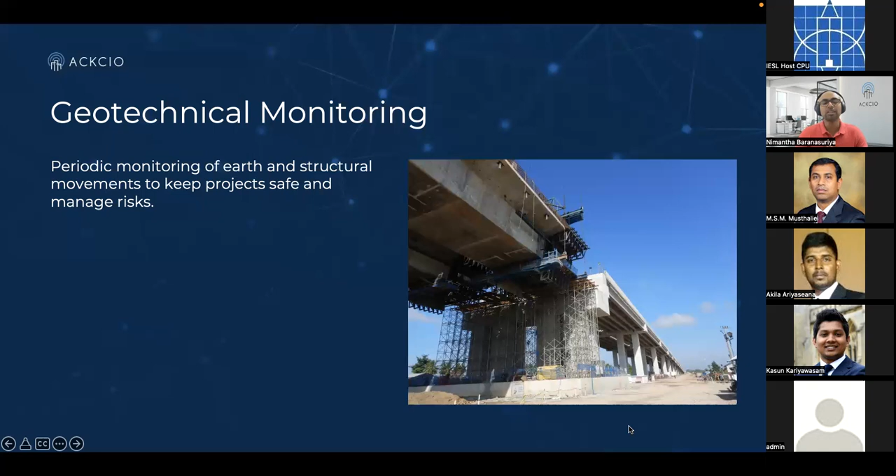It helps engineers gather lots of data from the actual construction project and compare those data points with the design of the project and see whether something is deviating from the norm. So if something is deviating, they can take early action and prevent a very costly accident from happening. And if an accident were to happen, the consequences can be devastating, like people might even lose their lives. And also there might be monetary losses and delays of the project as well. So this is why geotechnical monitoring is very important. So people have been doing geotechnical monitoring for the longest time.

I mean, this is not a new area. And there are so many sensors that help engineers and consultants get various data points from all their infrastructure development projects. So some simple examples include tilt sensors. You can place tilt sensors on any wall or any column that you want to monitor, and then check whether it's still straight or whether it starts tilting over time.

And there are things like crack sensors. So if there's a crack on a certain wall, again, a crack sensor can be put against it to monitor whether the crack is expanding over time. Right? If the crack is expanding, it can be a dangerous sign. There are other sensors like soil water pressure sensors, like piezometers, that can be embedded in soil to monitor the soil water pressure. And those are very important in excavation projects where the water body of the soil is disturbed.

And there are things like strain gauges or load cells that can monitor the load that is being carried by a beam or even a column. And there are other complicated sensors like deformation sensors which can go into the soil, like hundreds of meters into the soil, to monitor how the different layers of the earth are deforming because of excavation work or any other soil movements, right?

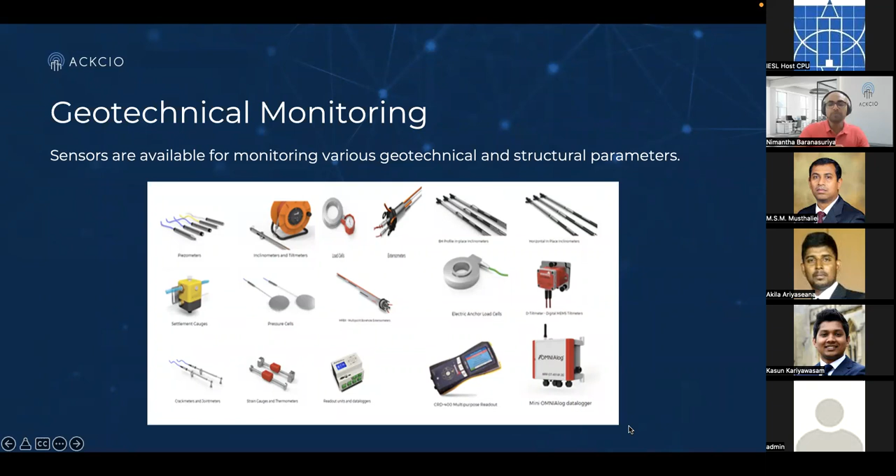So the sensor space is quite diverse, and there are so many sensors in the market already that allow engineers and contractors and consultants to monitor any parameter of their choice in their critical infrastructure development projects. But what's problematic is that these sensors are currently monitored using very legacy solutions. Meaning, let's say you need to monitor a set of tilt sensors, piezometers, even crack sensors in a project. So there are two main solutions that companies leverage for this monitoring purpose.

One is workers. So they send workers with these handheld sensor readers to visit every single sensor in the site and take readings using this handheld sensor reader. So this process is very costly because it involves a lot of workers going around in the site monitoring sensors. And also it actually imposes a safety risk because when there are more workers in the site taking all the sensor readings, they can be prone to accidents in the site.

And secondly, the accuracy of these readings can be low as well because the worker has to manually connect this reader to, say, for example, the tilt sensor to take a tilt reading for the day. And while doing that, they might be tired or might not connect the sensor properly, and in that process might take incorrect readings from the sensors.

And lastly, if you're using workers, it's very difficult to monitor sensors frequently. So at most, a sensor can be monitored once a day, which is problematic for certain projects like excavation projects where the earth and the structures might move very rapidly in a matter of 24 hours. So those are the problems associated with using workers or manpower to monitor geotechnical and structural sensors.

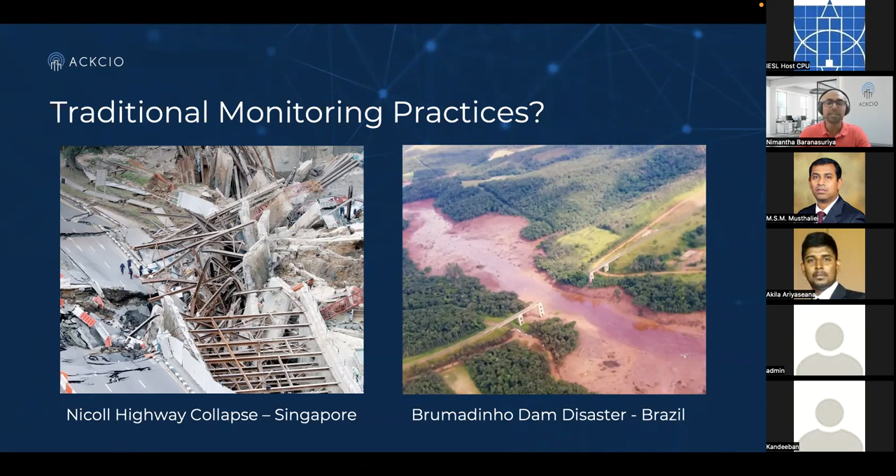So moving forward, we discussed the problems associated with legacy monitoring practices. If monitoring is done in real time using remote monitoring technologies, there are many advantages that can be achieved. One is workforce safety, because you're not sending workers to the site anymore to take manual readings. You don't need to expose workers unnecessarily to hazardous environments, and therefore the safety of the entire project goes up. Secondly, and most importantly, you can implement better risk management processes, because now you have a very seamless way of getting all the sensor data gathered from the entire project. You have the data at your fingertips to take real-time decisions.

To keep things simple, let's say you're monitoring a tilt sensor, so you'll be getting tilt data once an hour. So once an hour, you know whether the column that you're monitoring is upright or whether it is starting to tilt. And before it tilts a lot and collapses, you can take quick actions to investigate why the column is tilting and take appropriate risk management solutions to ensure that the safety and the integrity of the project is not compromised.

Thirdly, remote monitoring can help reduce costs, because now you are dependent on fewer workers and less cabling. The wireless solutions that are available in the market now can help dramatically reduce the costs of monitoring geotechnical and structural sensors.

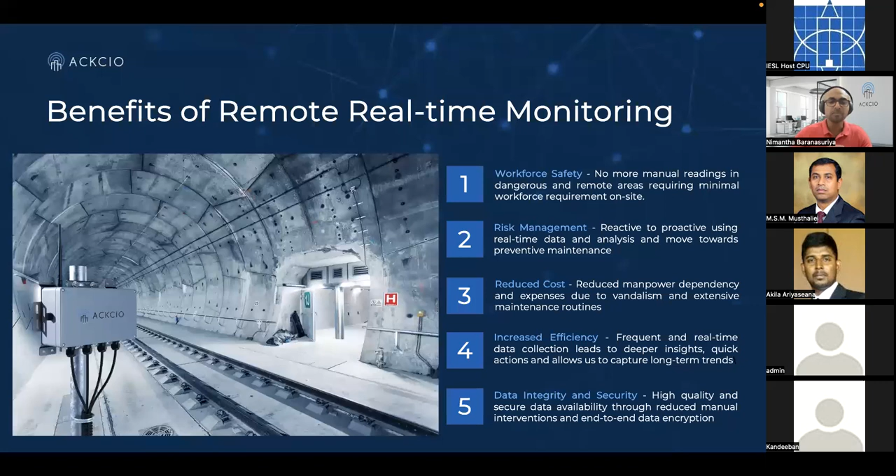The fourth benefit is increased efficiency, again, because now you have seamless amounts of data coming in. You can take quick decisions, and the entire process of constructing the infrastructure project becomes quite efficient. And finally, the data is secure, and everything is integrated into one system, which will help stakeholders like consultants, engineers, and everyone involved in the project understand what's happening in the project and take quick decisions as well. So these are the benefits of doing remote wireless monitoring.

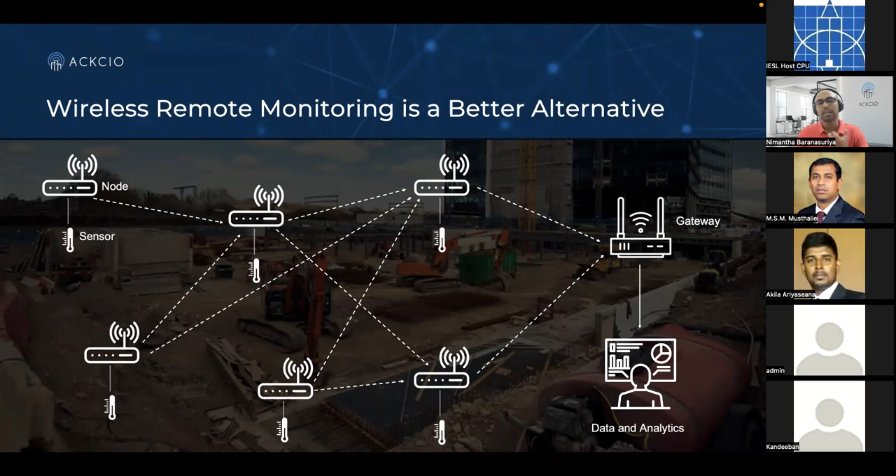So now, how is this different from the previous solutions? Well, if you're using manpower, you have to send a worker to every single one of these sensors to monitor them manually using handheld sensor readers, like we discussed earlier. And if you're using cables, you have to run a cable from each and every one of these sensors to a central computer called a data logger. So instead, you connect a wireless transmitter. These are battery operated, and therefore they can be placed anywhere the sensor is. That eliminates the workers, because now the wireless transmitters are taking sensor readings and transmitting them wirelessly to the gateway. And the gateway then uploads that data to a central software system. So this is how the whole work site or infrastructure project can be automated by using wireless technologies to monitor sensors in a more productive and efficient way.

So when using these kinds of solutions, the entire monitoring process becomes cost effective, because you're not using workers and costly cables anymore. The data is more accurate because there are no workers in the loop. It's an entirely automated system. The productivity is very high because you can monitor sensors very frequently. We've had experiences in projects where our sensors were monitored every 5 minutes because there's a lot of movement in those projects. When you have that amount of data coming in, you can take very quick decisions, which will increase the productivity of the construction work. And finally, and most importantly, the safety of the project goes up dramatically as well, because you are using fewer workers, and the data you gather helps you keep the infrastructure development project safe.

So that's part one, where we looked at the geotechnical and structural sensor monitoring process, the legacy solutions that have been used, and the problems associated with them. We also looked at how wireless technologies can help automate the same monitoring process of existing geotechnical and structural sensors in a cost-effective and more productive way. So in this section, we'll look at different wireless technologies available in the industry and see the pros and cons of each of those technologies.

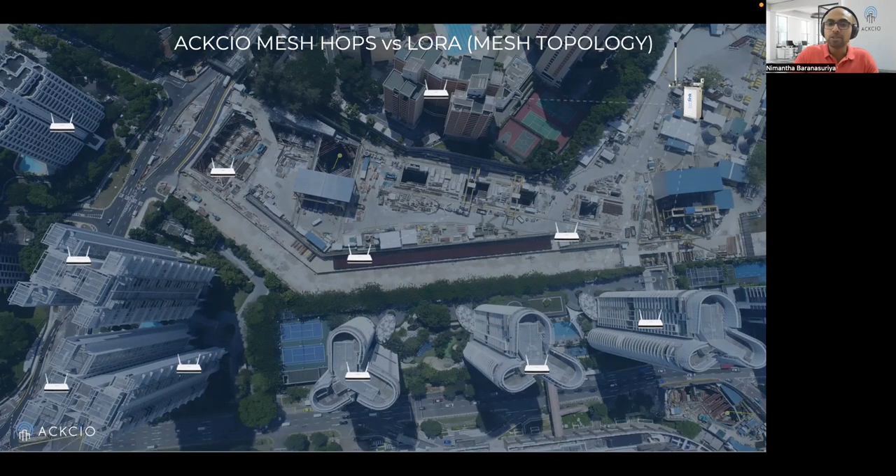So they deployed the sensors, and they had to monitor the sensors every hour while the excavation was happening to see whether there was any unexpected movement or anything unexpected happening in the construction site. So they tried LoRa-based systems earlier. The problem was that the sensors that were close by to the gateway could communicate the data directly to the gateway. But the other sensors that were far away from the gateway could not reach the gateway directly.

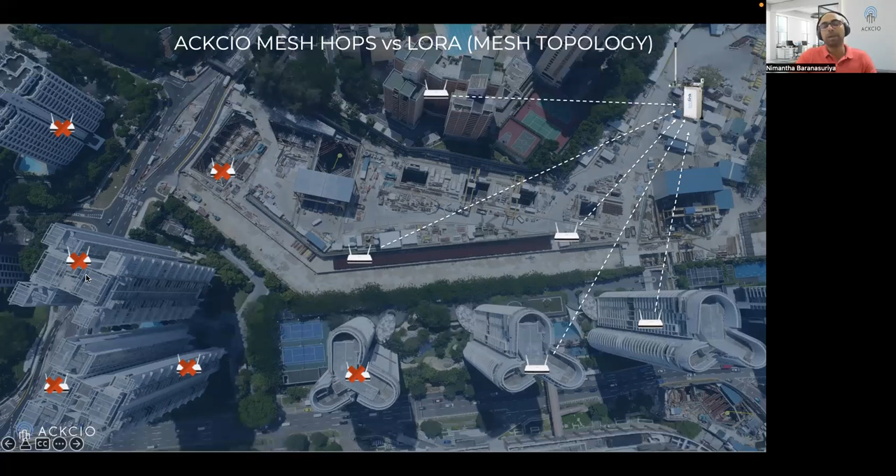And if you recall what I mentioned earlier, in star networks, every device has to talk to the gateway directly. So if devices are too far away or if there are obstructions, that sensor data is practically unachievable. So what the contractor did after that is they deployed our solution, which offered them a mesh-based system. So the result was that, again, as you recall, long-range mesh systems still have long-range communication links.

So the devices that were even a few hundred meters away could talk to the gateway directly, and the others that were too far, like some of these devices were in underground basements monitoring the car park, could also use long range links to talk to their neighbors and then relay that data back to the gateway.

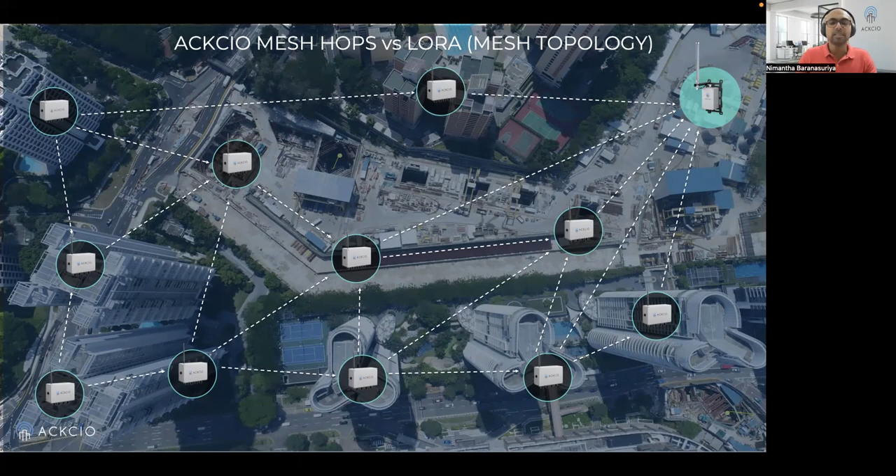So when you have a mesh system as compared to a star network, you gain a lot more benefits, like more connectivity options, more connectivity paths available. So if paths get dropped or get obstructed, they automatically recover and send all that sensor data to the gateway. So this is how, at the end of the day, the contractor monitored that project.

So now coming to part three. So in part two, essentially, just to summarize, what we discussed was the wireless technologies that are available in the industrial monitoring space, which fall into two categories: star networks and mesh networks. And we evaluated the pros and cons of both and argued why long-range mesh-based systems are better for critical infrastructure monitoring projects, because they offer many more benefits that make monitoring very seamless or very easy to do in critical infrastructure monitoring projects.

So now going into the wireless topic a bit further, I'll go into the solutions, like how a wireless solution works, and some case studies as well, to show you how wireless monitoring can really help gather geotechnical and structural sensor data in critical infrastructure projects. So I'll use our solution as an example to show you how these systems work in real life.

So at Ackcio, we provide a wireless data acquisition system that can interface with existing geotechnical and structural sensors. So meaning, if you recall again, the sensors already exist in the market. And what we should do as solution providers is to help contractors monitor their existing piezometers, existing crack meters, existing tilt meters, and existing deformation sensors, all existing sensors, using wireless technologies as opposed to using workers or cable-based systems. So that's what we discussed earlier. So what we provide is a wireless solution that essentially does that job.

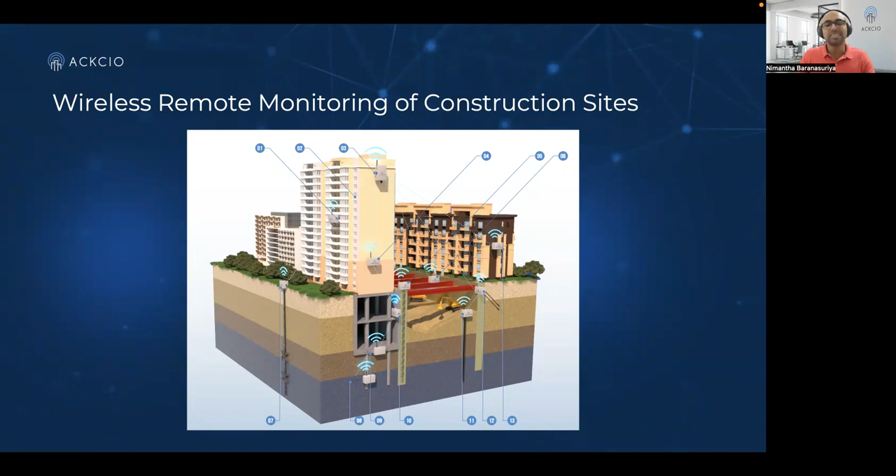And the nodes would then use a long-range wireless mesh protocol to send the data to a gateway, and the gateway will then upload that data to, again, a software system or a central server where you want to collect all that data. So with all that data, you can figure out whether this entire construction project is going smoothly, and if there are any unexpected movements in the soil or in the basement or in the piles or in the struts, then you can easily spot those abnormalities and take quick actions to prevent accidents and collapses.

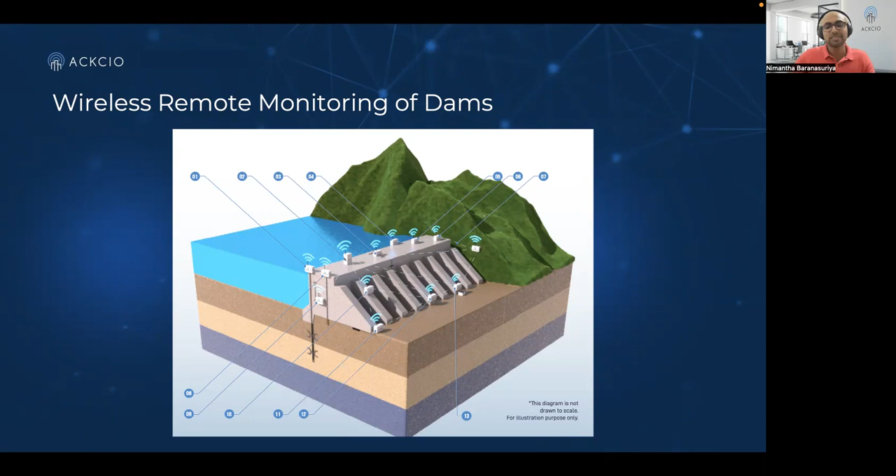So same thing for dams. Again, if you're talking about a dam project, it's a very critical project, and it can cost millions to build a dam. But if there are problems associated with the dam, the consequences can be devastating. So in dams, again, things like soil deformation, soil water pressure, tilt, and even the water level can be monitored using a wireless system like what we discussed earlier. So all those different sensors can be plugged into nodes and monitored using a wireless network through a gateway, which will help you to be informed of how the dam is performing. And if there's something abnormal happening with the dam, early actions can be taken to prevent any unfortunate accidents.

So same thing for bridges. So if you're building a bridge or maintaining an existing bridge, several things can be monitored: soil water pressure using piezometers, tilt on the bridge or the columns of the bridge, strain and load on the different columns and members of the bridge. And also the strain and load carried by the entire bridge can be monitored as well using various geotechnical and structural sensors. And again, those sensors can be monitored wirelessly and remotely using wireless technologies like what we talked about earlier.

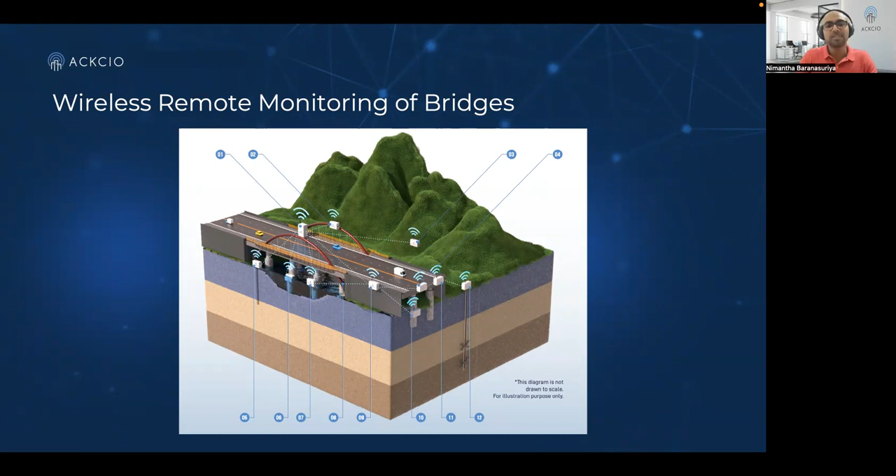And finally, this is the last illustration to show how a rail project can be monitored. There have been quite a number of projects in the rail sector that we've been involved in, where contractors monitor the tilt of the train track. So if there's some construction work or some movement in the soil near the railway track, it's important to monitor the track tilt, because if the track tilts, the trains that use this track might derail and cause lots of problems. So that's why tilt monitoring of tracks is important. And if there are embankments or other areas close by to the track, they can be monitored as well using piezometers or deformation sensors or even tilt meters.

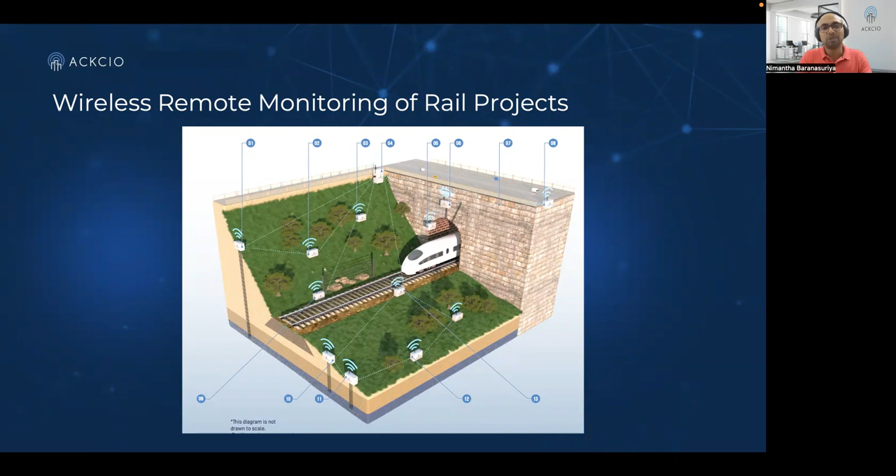So that's essentially four use cases that I quickly summarized, construction sites, dams, bridges, and rail, to show how critical these projects are, first of all, and how these projects can be managed by monitoring geotechnical and structural sensors using wireless technologies. And to show you some case studies, this is the final part of the presentation actually. Just some pictures to show how this is actually done in real life.

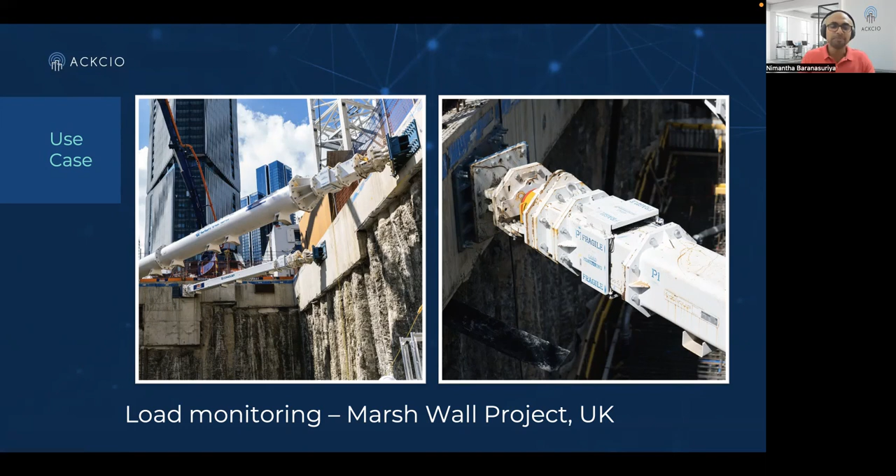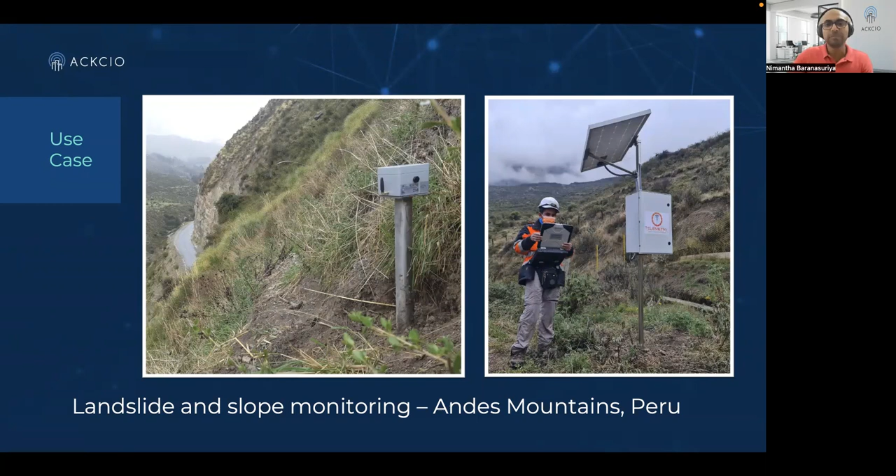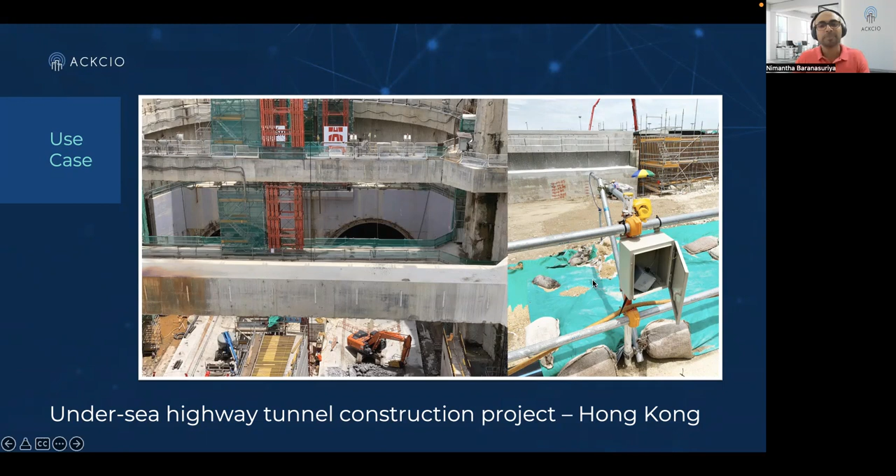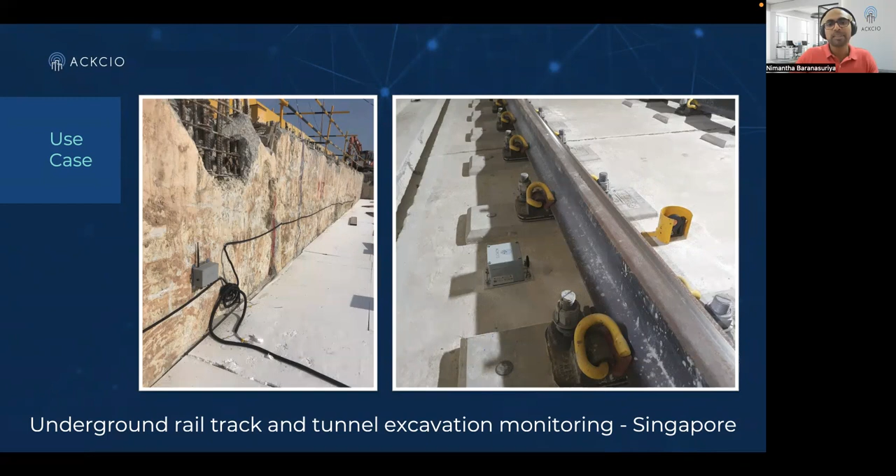So that's actually pretty much it for today's presentation. I just wanted to go through a few points to show how geotechnical and structural monitoring can be done using wireless technologies to achieve higher productivity, higher safety, and achieve cost savings as well. So just to summarize today's talk. First of all, we discussed why infrastructure projects need to be monitored using geotechnical and structural sensors, because such monitoring processes help contractors reduce costs, increase productivity, increase the safety, and also in some countries achieve regulatory compliance as well, like in Singapore, as we discussed. This entire monitoring process of geotechnical and structural sensors is regulated. So in order to meet these regulatory requirements, you have to monitor them, and doing it wirelessly can help them meet those regulatory criteria in an efficient way.